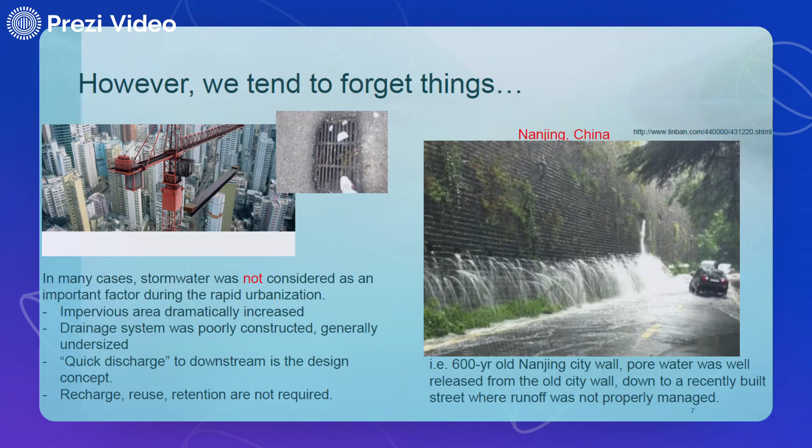We have large impervious areas in the cities. Well, the drainage is undersized or even not designed. Also, we have been designing drainage to get the water off the site as soon as possible. This is not correct. Not a sponge city, as I'm going to talk about in my next few slides.

Actually, 2/3 of the cities in China have been flooded in recent years. I also want to point out two major flooding events worth mentioning. One is in 2012. A flash flood hit Beijing and killed 79 people. People mentioned that event stimulated calls for a Sponge City initiative. Also, last year, a severe rain hit Zhengzhou, killed 300 plus people, and that event caused a lot of discussion and debate on Sponge City versus climate change and extreme flood events.

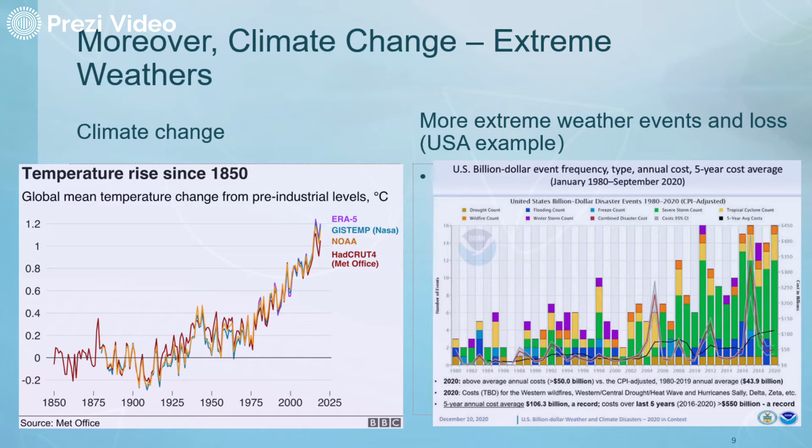Moreover, everyone here attending the Climate Week, I know we are on the same page about climate change. We know that more severe, more frequent extreme events will occur. We need to react, and we need to react now to offset the deadly impacts.

Besides flooding, I want to mention there are a lot of other things needed for stormwater management, like Sponge City, which I'm going to introduce soon. This includes improving the water quality, improving water scarcity, promoting water reuse and recharge, reducing the heat island effect, minimizing hydromodification in rivers, and managing combined sewer overflow in many very old cities.

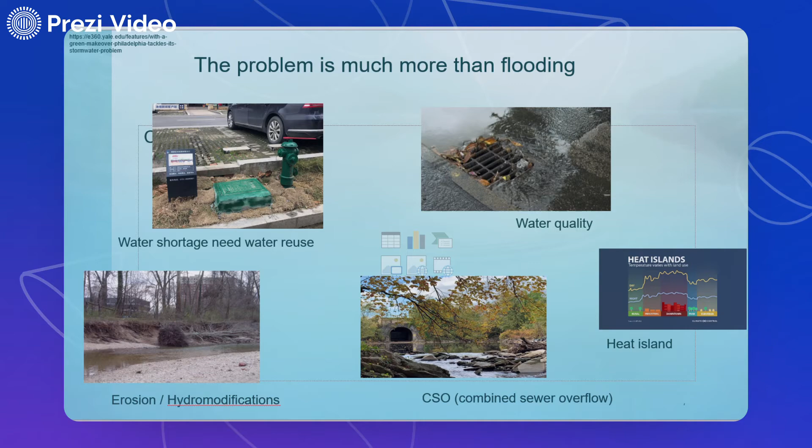To offset the complicated stormwater issues, we need an integrated solution. This is how China came up with the Sponge City initiative. Let me introduce what we have done in the last 7 to 8 years. It really started in 2014. China established a concept called Sponge City, which is used to tackle urban flooding and related urban water management issues. It utilizes the natural system to achieve drainage, to establish natural detention, natural infiltration, and natural purification, like a sponge.

I know the concept may be a little bit complicated, but actually it's different from low-impact development in the United States and different from sustainable urban drainage systems in the United Kingdom. The Sponge City definition is broader and more complicated. First of all, Sponge City is a change of paradigm. We now emphasize much more low-impact development, green infrastructure, resiliency and adaptation to climate change. We also use a lot of nature-based solutions, modern stormwater management, and sustainable solutions.

We want to manage stormwater closer to the sources, use smaller structures, and we no longer want to do quick discharge every time. We emphasize more retention, recharge, detention, treatment, and reuse prior to discharge. Secondly, Sponge City is a requirement, or a goal. About 80% of urban area in China is to be constructed to control 70% of precipitation on site by 2030, which is a requirement of Sponge City.

And lastly, Sponge City is a bunch of practices and measures to improve stormwater management site by site, city by city, with special emphasis on promoting green infrastructure. For those of you who are not familiar with stormwater management and green infrastructure, these are some pictures and examples of what we typically do for the sites. Regarding stormwater management at the site level, we need a lot of guidance.

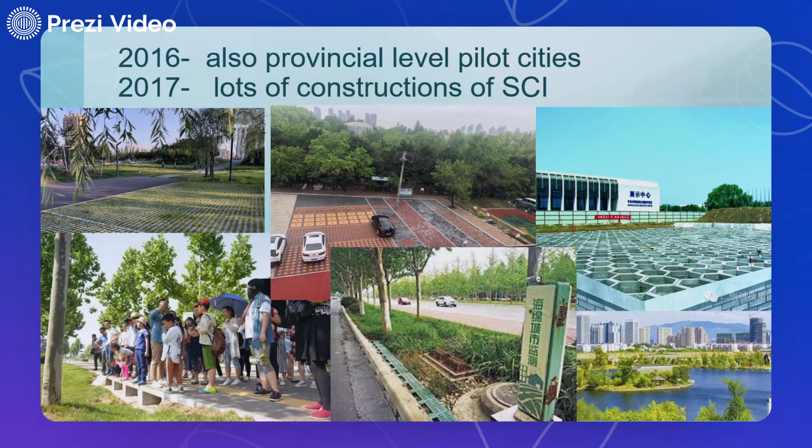Second good thing, Sponge City in China is a very immediate action to tackle the threatening stormwater issue and to offset the impact of climate change. We need enormous investment and effort to correct a very big problem. And China is actually good at doing this, like what we did with high-speed trains, where we're doing a very good job.

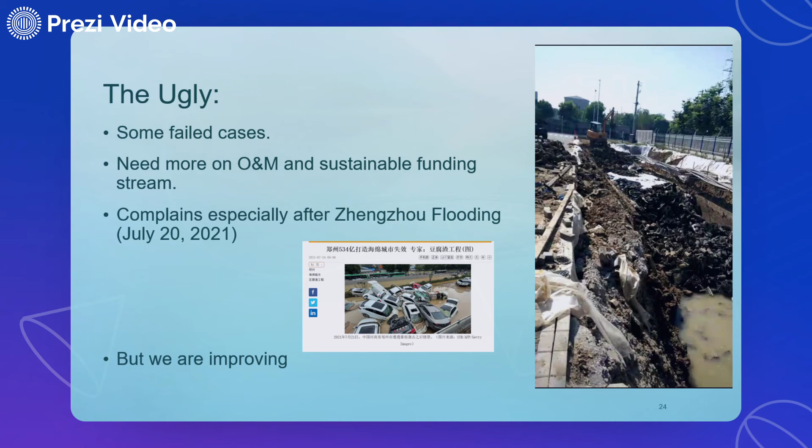Last but not least, you pay your tuition, of course, right? On the right side, the picture shows some failed design or failed construction. On the other hand, the resistance to sponge city still exists. There's also a lot of time sponge city takes a lot of blame, which usually shall not be counted towards sponge city mistakes. For example, after the Zhengzhou flooding event last year, people blamed sponge city, but that actually was a more than 1,000-year storm event, and we do have a lot of things to improve, but that's not the correct way.

Well, one of our jobs, or everyone's job, is to turn bad things to good things. Over the last few years, all the water resources engineers worked hard, and we see that more guidance manuals and standards and drawings are being published. We see more sustainable stormwater management systems being constructed. We see a lot of good publications. Also, the long-term performance is being addressed. Very importantly, we have people thinking and working on Sponge City globally.

Sponge City benefited from international collaboration at the very beginning by learning from other countries. And now it's also a good time to share what has been learned in China with the rest of the world. Well, now eight years into the Sponge City initiative, we also see more and more information on the internet. There are a lot of papers being published, and a few countries have mentioned Sponge City in their own media. Everyone is in a climate changing world. Everyone is actually a student. We learn new things, and we need to share what we have learned, and we want to learn together.

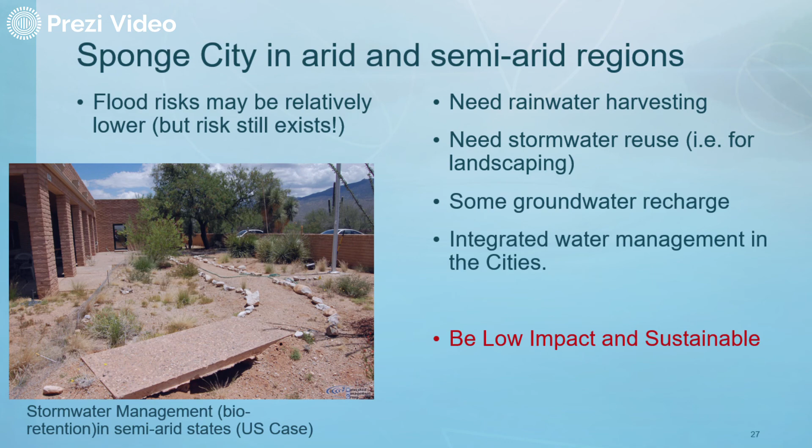Sponge City in arid and semi-arid regions. As I mentioned in the previous slide, Sponge City has multiple goals and benefits. There are a lot of incentives to do Sponge City or something like it in arid and semi-arid regions, such as groundwater recharge, water harvesting and water reuse. We always need to do low impact development in urban areas. The goal: we need to be low impact, we need to be sustainable, and we need to be resilient to climate change, no matter where you live. That's the bottom line. Just for information, flooding does occur in China and also in the Middle East, like last year, due to climate change.

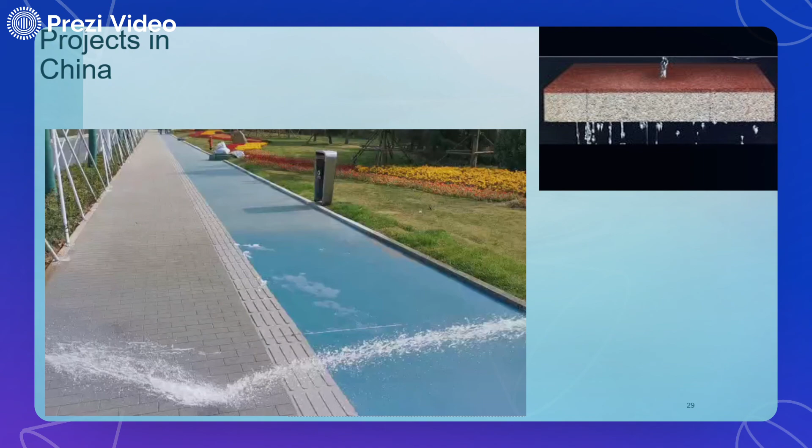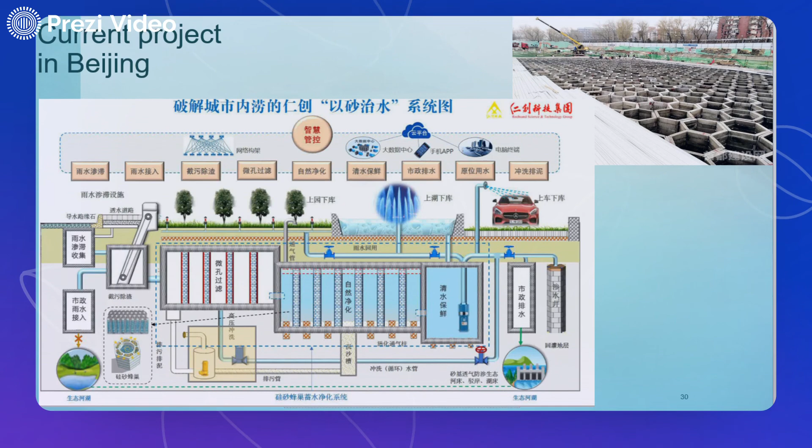At the very end of my presentation, just some of the Sponge City projects I'm currently working on. As you know, I'm from the Silica Resources Utilization Laboratory, and those are new pavers we designed and developed, which are based on sand. Water can infiltrate into the ground immediately. Also some stormwater reuse, treatment, and harvesting underground structures. Also for information, since this conference is in Dubai, we are actually also working with our experts and partners in Dubai to do some sustainable irrigation and farming works.

So, a summary of my presentation today. First, stormwater is important in Asian cultures, but we tend to forget things. Stormwater was no longer properly managed during rapid urbanization. Second, with the Sponge City initiative since 2014, China has put an enormous effort to offset stormwater issues, which are due to the 30-year rapid urbanization and also climate change. We have 600 cities using the Sponge City initiative, and it's a $1 trillion market. A big effort on big issues.

We talked about the good, the bad, the ugly. Those are all experience, and our job is to change the bad to the good. And we also need to be low impact and sustainable. Lastly, we talked about international collaboration. I'm pretty sure that there are a lot of opportunities regarding international collaboration. We want to be students to learn together.